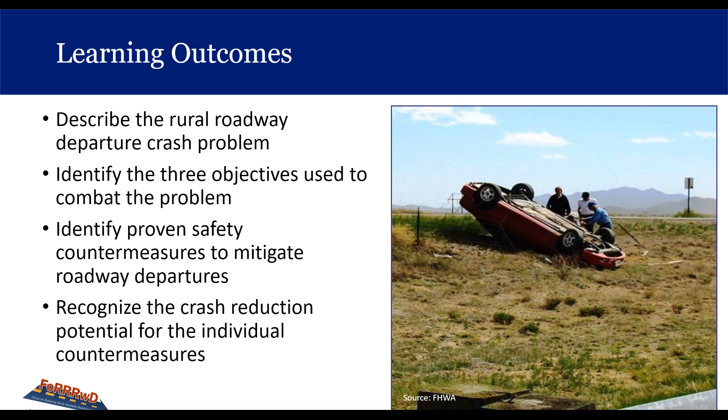So, a very sobering slide here. Federal Highway has a definition for a run off the road crash: a crash where a vehicle either crosses the edge line or a center line, or otherwise leaves the traveled way. So they don't actually have to physically drop off one side of the road or the other. They could just cross that center line, and it's considered a roadway departure because they've actually left their lane.

Unfortunately, last year we saw an increase in traffic fatalities, and you would think that's counterintuitive to what would have happened during the pandemic, since pretty much all of us on this call know that the average daily traffic went way down for big chunks of time during 2020. But unfortunately, with less traffic on the road, something clicked and people started driving in a much more dangerous fashion when it comes right down to it, because we actually saw an increase in traffic fatalities.

And that number you see there, 38,680 - that's a preliminary figure for 2020 as of the beginning of this month, June 3rd.

So of those crashes, take a look at the split on this: 49% of the fatalities are happening in the urban area, and 51% are happening in the rural area. If you break that down further, of that 51%, you're looking at 34% that are actual rural roadway departures. So if you're following the percents, the bigger percent is 51 on this first slide, and on the next slide, the bigger percent is 34.

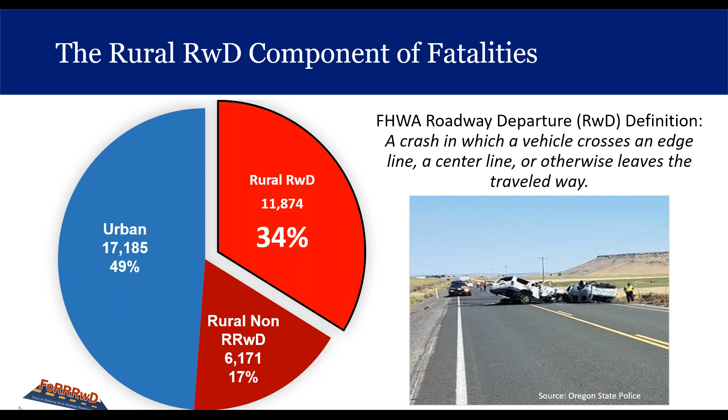So what we're trying to get to is what I'd look at as low-hanging fruit. What's the biggest problem we can tackle first? When you look at that, you'll see that these rural roadway departures really are overrepresented in the crash totals.

So if you break that down and do the calculations, from 2014 to 2016 the US averaged 11,874 rural roadway departures a year. You divide that number by 365 days, and you come down to 30 people a day.

And when you say 30 people, you really have to put faces and lives with that number. It's not just a number - it's 30 people who didn't come home and pick up their mail at the mailbox and come in and start making dinner, or come home and start working on their homework. Those were 30 empty seats at the dinner table for those families. And that's just from one day - tonight, 30 people won't be there. And it's our responsibility as roadway professionals and safety professionals to save the people behind this 30 number. And that's why you're here.

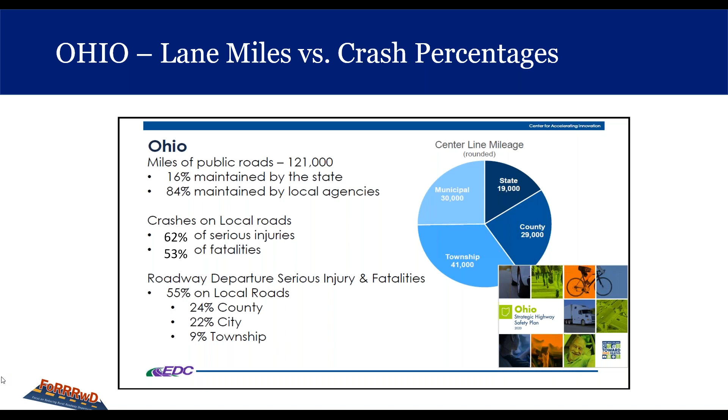All right, so we've got another Mentimeter question here, and I'm going to go ahead and pull it up. I would like to know how you think the following items, which I'm going to show here on the screen. Sorry, it's a lot to kind of navigate between things, but I want to make this as interactive as possible.

I want you on your Mentimeter to rank in order what you think the different crash types are. These are the top 5 crash types from Ohio's Strategic Highway Safety Plan. And if you downloaded the handout in the handout section for today's slides, don't look ahead. But I want you to tell me which ones do you think rank first, second, third, fourth, fifth. I did pull just the top 5, so no fear looking ahead.

And we've got 8 people who voted here. Ray, what do you think?

I'm going to give you a hint: roadway departure. But what are you thinking about for second place?

I'm thinking speed. That's what a lot of people are thinking too. I've seen some statistics from this past year that speed was involved in a whole lot of crashes, and this isn't just last year. This is straight out of our Strategic Highway Safety Plan, the document I showed an image of earlier, covering 2015 to 2019.

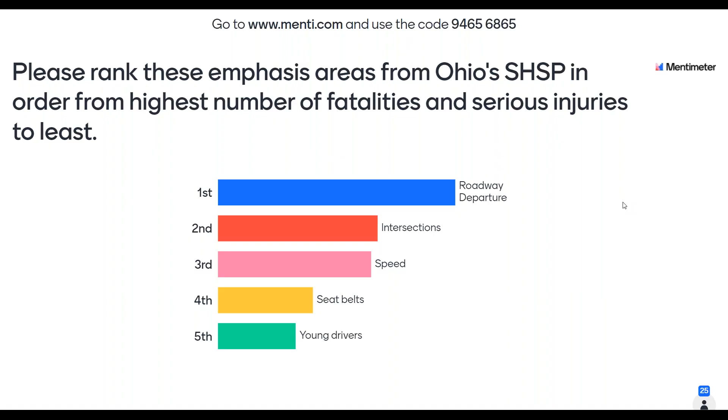All right, I'm going to take us back to the other slide and show you what the answers were. You were right, as everybody was, that roadway departure is the top cause of crashes. After that came intersections, which the 25 people who voted also chose correctly. Then you guys said speed, which actually was 5th. They attributed young drivers as 3rd and seat belts as 4th, as far as the highest number of fatalities and serious injuries. But there are more ranked farther down on this screen. I just pulled out the top section to make it as readable as possible for you.

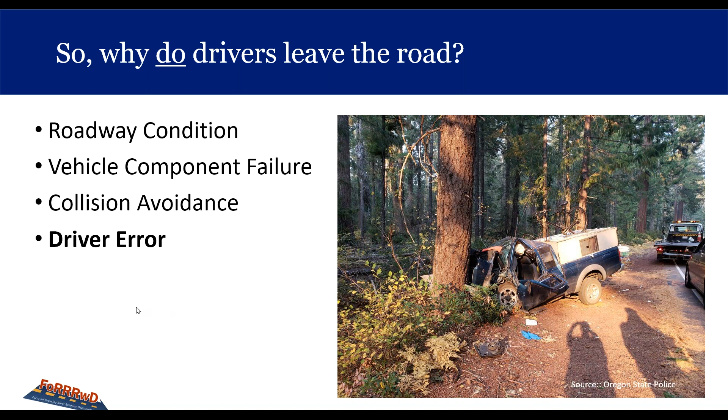Yes, thank goodness. So, I wasn't even injured at all, by the way. Well, that's good. I heard your dad wasn't too happy about losing his car, though, right? Yeah, yeah, but he's happy to have you still. So, all right, well, on the next slide - I accidentally muted myself, sorry.

The talk covers the driver being the weakest link in the system and the need to design around the human. So if you look at this Venn diagram and the overlapping parts, say you look at the vehicle being 13%, you have to take the whole of all the percents inside that vehicle circle to come up with the 13. Same with the roadway. And then the driver was actually 93% of the reason why the crashes are happening.

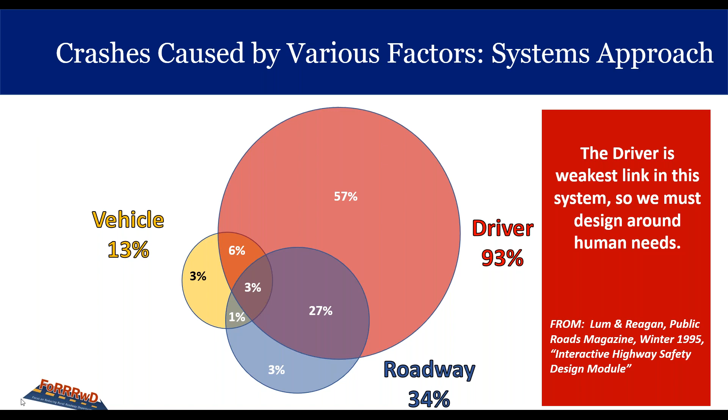So I have my own rural roadway departure story. I was coming home back in 1994, after I'd gotten off work one day and had gone to the doctor's, was on my way home on a rural road, nobody really normally on this road, and I was very young and stupid and was driving along, and came up on a car that had signaled that they were going to turn right. So I thought, get home as quick as I can, went to pass on the left, and instead of turning right, they turned left. And I T-boned them, and we all ended up down in the ditch together, and it was a pretty steep ditch - I believe my car was nose down, and by the grace of God, none of us died. But I'll tell you what, I don't pass people on rural roads anymore, and I certainly look to make sure people actually turn the way that they signal that they're going to turn. So rural roadways can be very dangerous, especially when the driver makes the wrong choice.

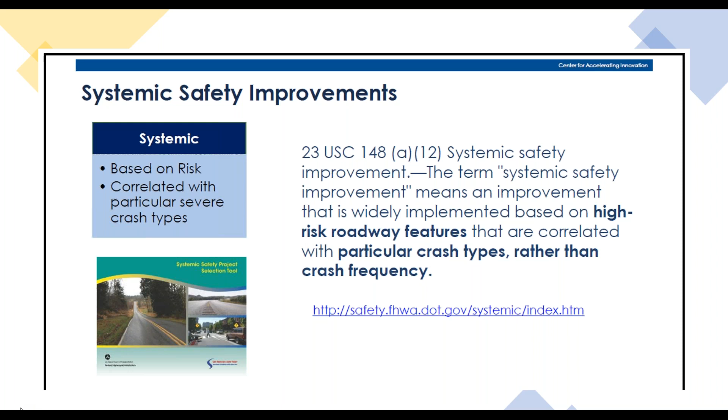So systemic safety improvements are really applicable in the low rural roadway system, our local roadways, and specific crash types. One thing in Ohio, and I'm pretty sure most of us have seen it when we've been out driving on the interstate system, the state DOT had already been focusing on systemic improvements.

So one of the first ones they did was the cable median barrier. Now this isn't something that you necessarily use on a rural road, but it's an example of a systemic safety improvement that I could say probably most of you on this webinar have seen. And they did that based on specific criteria. The median had to be under a certain width, and they put it out there on the system, and it has definitely saved lives. So you could do the same thing.

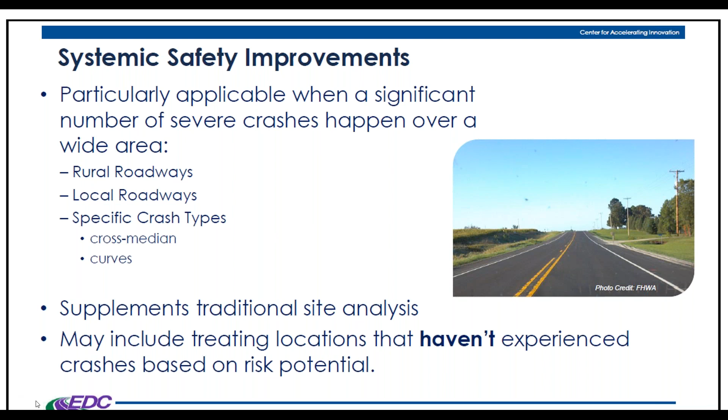You could look at your system and say, okay, any curve that has this type of radius or this type of super elevation, then we're going to just systemically make this improvement to it. So it does supplement that traditional site analysis, but it allows you to include the areas that haven't actually had a crash yet. So the roadway features that are considered high risk, there's a lot of different things you can look at, and we'll be discussing these throughout the webinar.

But one of the first ones I know that we're going to focus on are the curves. So when you look at the roadway features, you have your horizontal curve radius and the density, and the presence of a visual trap.

I could show you some good videos of visual traps, especially when you have a road that's been maybe constructed or reconstructed and the old road is still there, and it's not well signed. So you come up to it and it looks like maybe you should continue straight, but all of a sudden the road's curving off to the left or to the right. And if that person hasn't driven the road before, they really don't know which way to go.

So the presence of an intersection, especially if the driver isn't anticipating it and you have traffic that's coming into the intersection trying to cross when the person who's coming through that intersection did not have to stop on one of the approaches, then that could cause a pretty severe, if not fatal, T-bone crash.

And then your exposure, what's the ADT out there, the speed limits, or what's really the safe speed for them to go through a curve. We're going to talk about that some still this morning.

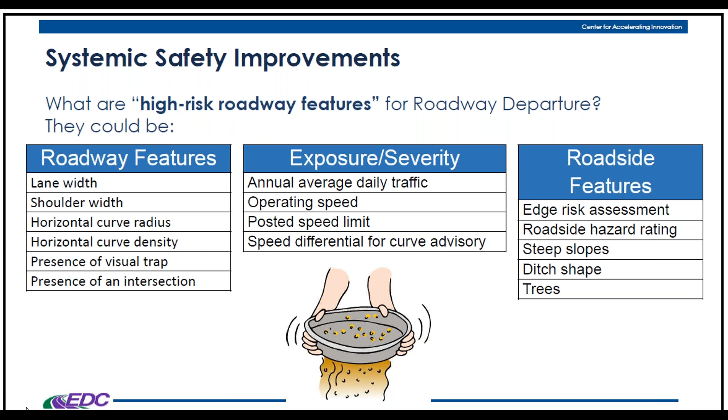So I've got another video for you. I'm trying to keep things interactive today. Actually, I've got a couple here I'm going to show you. The first one we're going to start off with, and I know it's talking about an interstate ramp, but I want you to listen to what they have to say about the curve and the advisory speeds. Then I'll show you a different video. This first one's called 'Advisory Speeds Are There for a Reason.' By the way, this is not ODOT, meaning Ohio, it's another one of those O states.

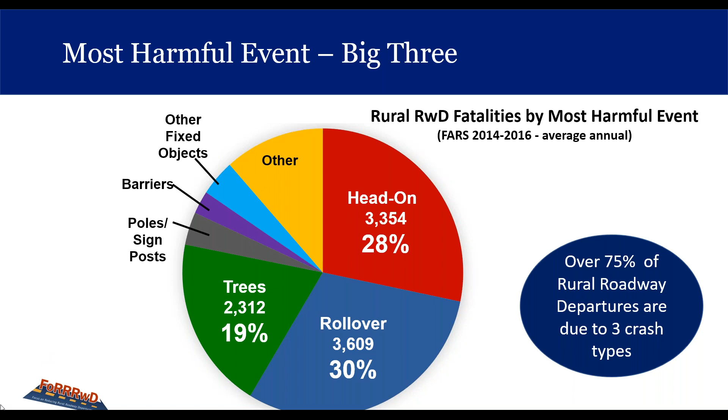So, the most harmful events, they talk about the big three, and those are your head-on collisions, which are considered roadway departures because you've left the traveled lane. Then you have your rollovers that happen when people depart the roadway, and then trees that are in the roadway. That's the clear zone I mentioned, and we have handouts for you in the handout section of the GoToWebinar box. Over 75%, based on FARS data from 2014 to 16, of rural roadway departures are due to just those three crash types. So it's really critical we look at that information and deal with the low hanging fruit.

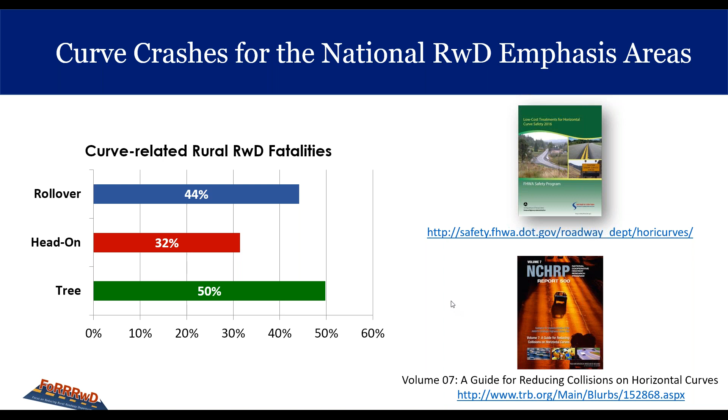Go for those big percentages where you can get hopefully the biggest impact on driving crashes down. For curve related rural roadway departure fatalities and those three types, there are some guides out there that can help you. We have provided you the PDF of today's slides, so you should be able to get to these links, and these documents are available at no charge on the internet. You can just click the link and get to the guide. Both the low cost treatments for horizontal curve safety, and NCHRP Report 500, which is actually a series of different reports. Volume 7 is the guide for reducing collisions on horizontal curves. That guide from 2016 is an update to the 2006 version that was originally done. But if you focus on how to prevent these crash types, you'll hopefully drive down the numbers on your system.

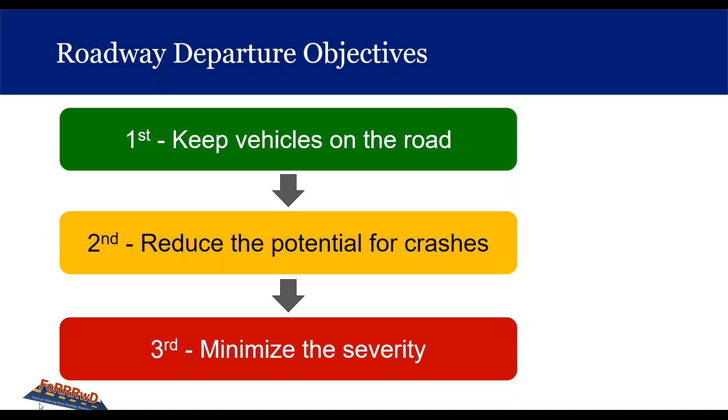So, roadway departure objectives. This was one of our learning objectives up front, if you remember. There's a three-part way to look at this. The first thing we want to try to do with these vehicles driving our rural roads is try to keep them on the road. So that's where you're looking at different types of improvements, such as your curve signing, pavement markings, friction treatments, and rumble strips.

One thing that baffles us when we look at crash reports is it isn't always the curves on rural roadways where people run off. We really feel that people pay less attention on a rural straightaway than in a curve because they feel safer. The road's going straight, so they think they can look away to change the radio or check a smartphone, which they should have turned off and locked in the trunk, because distracted driving is impaired driving—just as bad as, or worse than, driving drunk.

So these types of treatments, especially rumble strips along the side of the roadway, can help with those straightaways, get people re-alerted, and make sure they get themselves back into the roadway where they should be.

And if they do end up departing the roadway, we want to reduce the potential for a crash by making sure, if at all possible, that there are shoulders. We're going to talk about the safety edge. Our LTAP center has a safety edge paving shoe—if you've never tried it and your contractor doesn't have one available, we'll loan it to you. It costs less than 1% of your entire paving project to add a safety edge, and it clearly helps people get back onto the roadway.

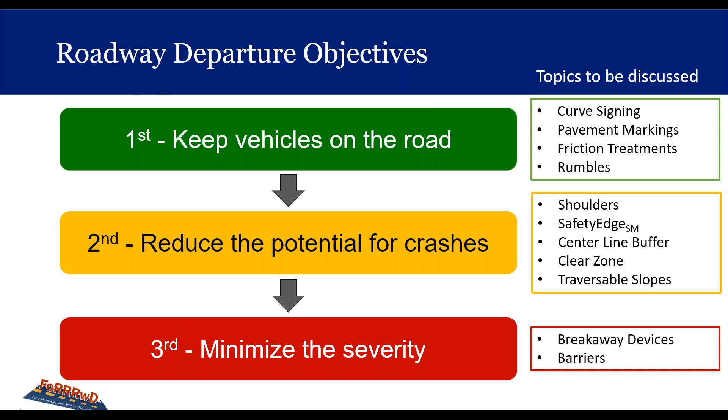And if they aren't able to stay on the road, and you're looking at reducing the potential for crashes but can't get them back onto the road quickly and easily, and they end up in an actual crash, you want to minimize the severity. That's where we'll talk about breakaway devices and different barriers. So remember these three principles: keep them on the road, reduce the potential for a crash if they start to depart, and minimize the severity if they can't get back on the roadway.

I mentioned crash modification factors earlier, and as part of that there are also crash reduction factors. The Highway Safety Manual has the methodology for calculating these, but there's also the Crash Modification Factors Clearinghouse, which can be a big help. The crash modification factor estimates the change in how often a crash is going to occur on a specific element of the roadway by implementing a certain countermeasure.

They look at the base condition, which is 1.0. If your crash modification factor is less than 1, it means you'll have fewer crashes. If the factor for a change you're considering ends up greater than 1, you don't want that, because it means more crashes. The crash reduction factor is the actual percent reduction in crashes that can be expected—this can be positive or negative, with negative meaning an increase. Hopefully I didn't confuse you there.

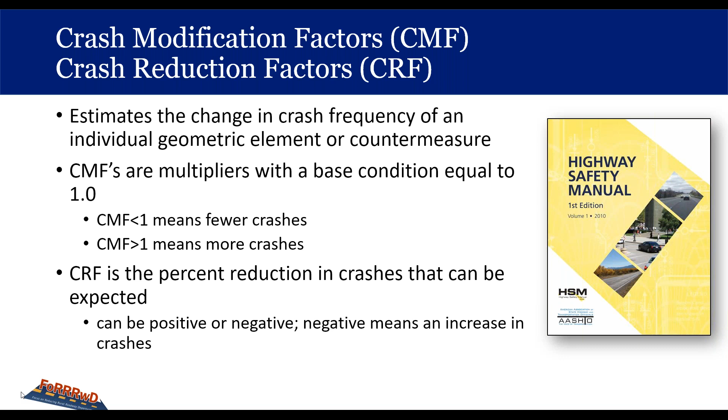Just remember, once you put the change in, you want your crash modification factor to be less than 1. And there is the Crash Modification Factors Clearinghouse out there—I'll definitely send you a link to that.

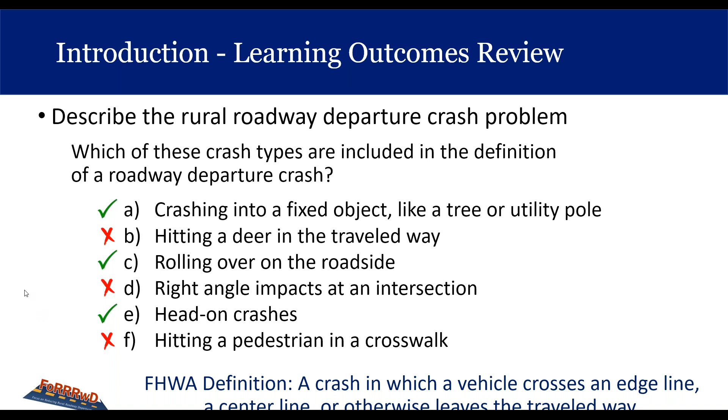So there's the definition at the bottom. Hopefully you've got that now, but it seems like the majority of you did, so that's great. All right, I'm going to switch back to Menti. We're going to do the second of our questions.

All right, what percentage of roadway fatalities are due to roadway departure crashes on rural roadways? And this, we're looking at nationally, we're not just focusing on Ohio. There was a percent that was given, so hopefully you guys will be able to remember what that percent was.

I love the little dot exercise here where it kind of spreads out into different dots on the screen. This is probably one of my favorite little Menti screens. Just keeps things interesting.

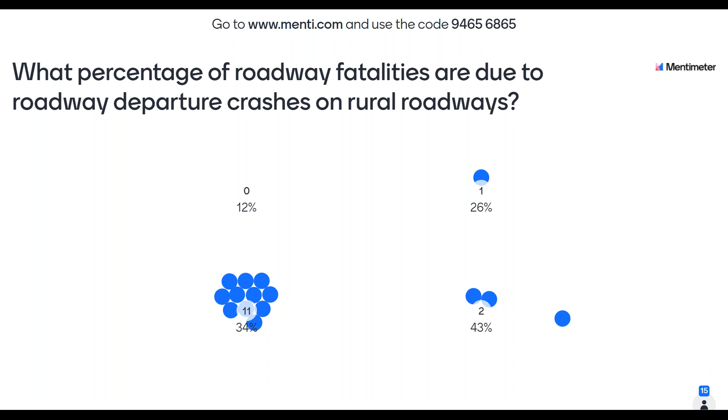Oh, we're getting up there in numbers. Okay good, getting even more responses than the last question. That's awesome. All right, I'm going to switch us back over so we can see the answer.

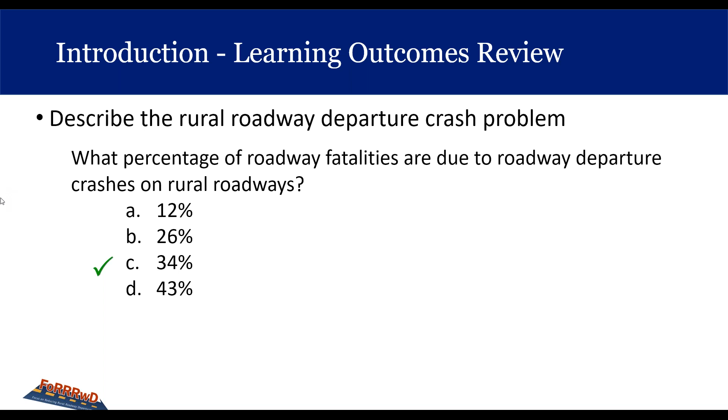Okay, so the percent, and 11 of you actually chose this, is 34. Good job. All right, and then the last of our Mentimeter questions for the day.

Oops, there we go. This is going to be the last of our review questions for this module. And you're going to type this in. But what are the 3 objectives used to combat roadway departure crashes? And we just went over this, so hopefully you guys remember that.

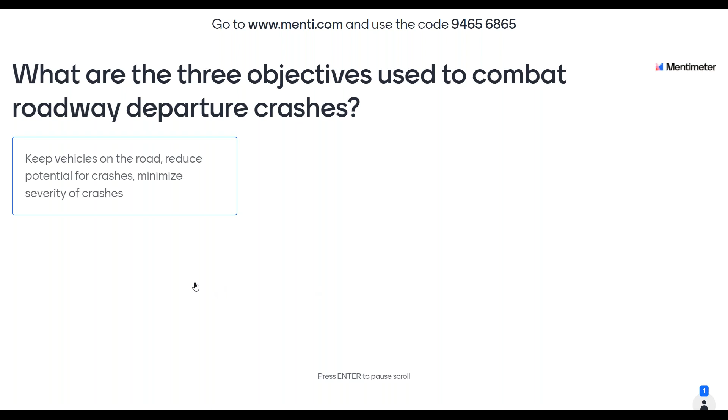Type it in for me. Hopefully somebody will type it in. I know Ray's not connected to Menti, so he can't type it in for us. But all right, here we go.

Keep vehicles on the road, reduce potential for crashes, minimize severity of crashes. Good, keep vehicles on the road, yeah, that's one of them.

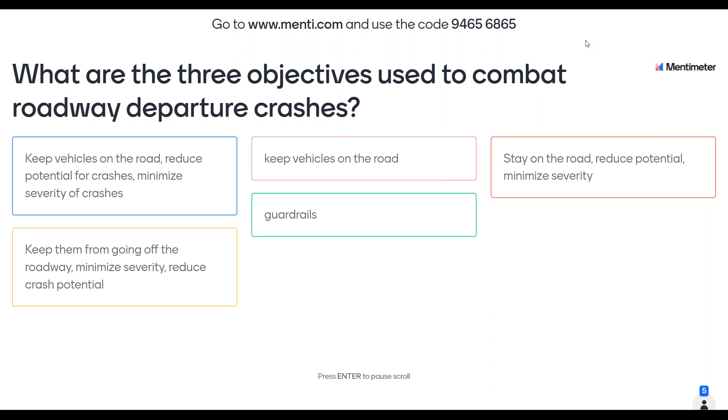Folks must not like to type as much as they do, we're just clicking to respond. Stay on the road, reduce potential, minimize severity. You got it. Yeah, guardrails is definitely a way we can do that. Yep, you guys are getting it.

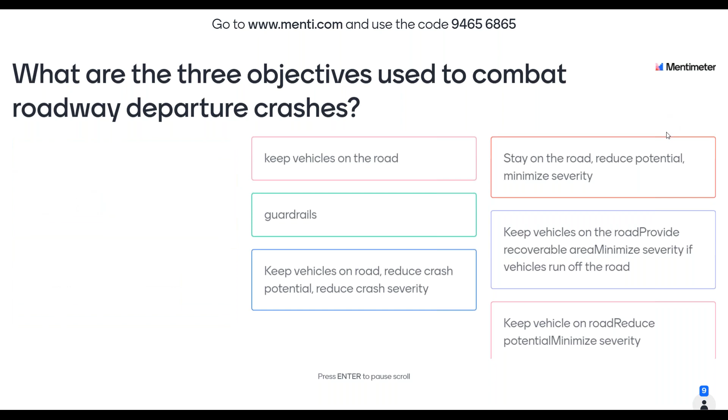Good, well I'm going to give you a second or two more to finish typing in for anyone who started typing that in, I appreciate it. And then I'm going to switch us back to our presentation here and the answer to the question.

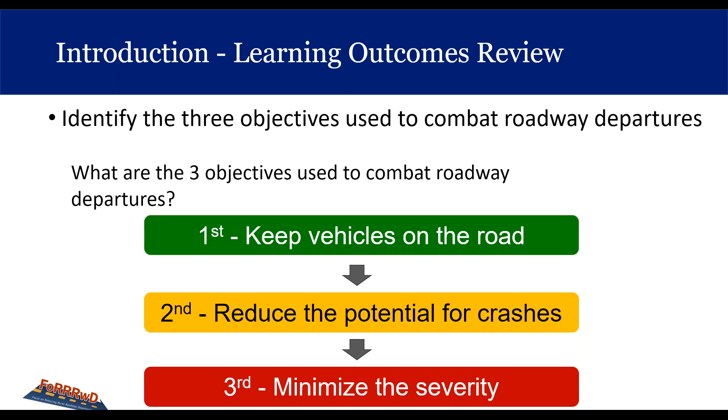We've got keep vehicles on the road, reduce the potential for crashes, and minimize the severity. So great job, guys. All right, well that's going to move us into our second session, second module in the course. And it's keep the vehicles on the road, signings and markings.

We're going to start getting into the actual application here of different types of countermeasures. So our learning objectives in this session module really is that we want to identify signing and marking countermeasures that can help you reduce your roadway departures.

And we're going to go over requirements from the MUTCD for signing and markings. And then we're going to talk about cost-effective enhancements that can actually exceed, because sometimes you're going to need to exceed, that's what it comes down to. I don't know if you caught it on that video of the advisory speed for the curve over in the state of Oregon, but not only did they put the advisory speed on the right-hand side of the road, but you saw that they had it there on the left, and that was to capture people's eyes. They were having a problem there, and it was a low-cost way to exceed the requirement.

And you have it on the right as a requirement, but they also put it on the left, which definitely was exceeding the MUTCD requirement, but it added an additional factor, a level of safety. So doubling up signs is always a great step.

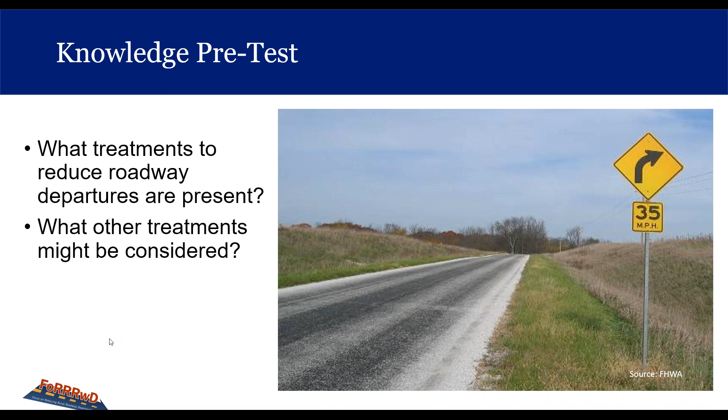So when we first started through LTAP working on road safety audits, we worked with the Warren County engineer, Neil Tunison, and we were able to assist him with getting signage put up on a lot of his roadways that had been identified as high-risk rural roads in Ohio. He was able to get the majority, if not all, of those roadways off that list from just the signage that we were able to assist him with getting put up. But he said one of the things that really surprised him, because not only did we help him with getting additional signage put up, like doubling up signs, but we went much larger in the size of the sign, big signs, and they were bright, they were retroreflective.

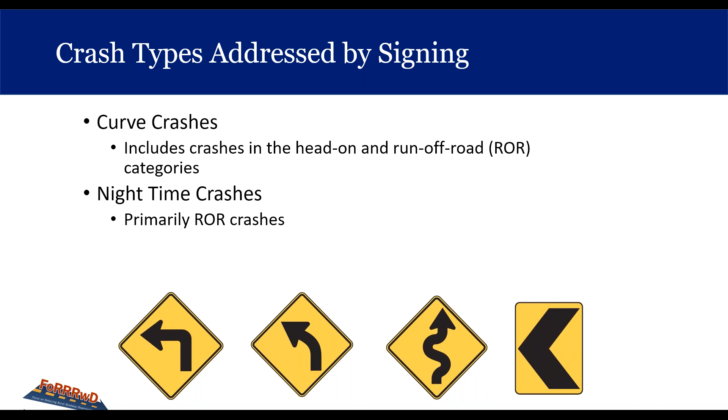He was really worried. He's told me this story, he said, I was worried those signs looked like the size of the highway signs showed up, but we went ahead and put them up anyway. And he actually had people coming up to him, even after church, different places, thanking him for the larger signs and doubling them up. He said they felt so much safer driving on those roadways, they could see the signs better. You can tell, even from the numbers afterwards when we measured it after the installation, it helped them out.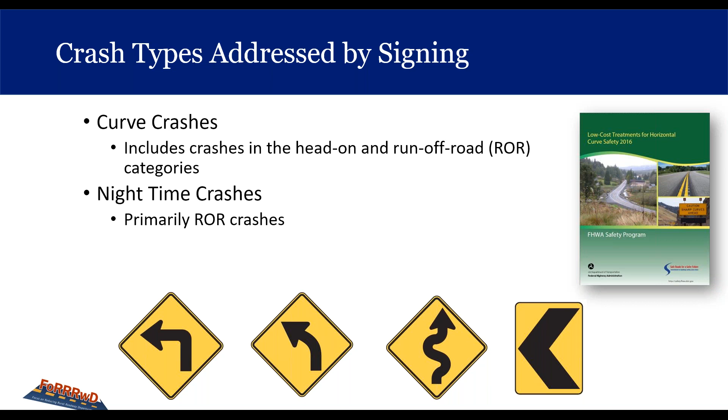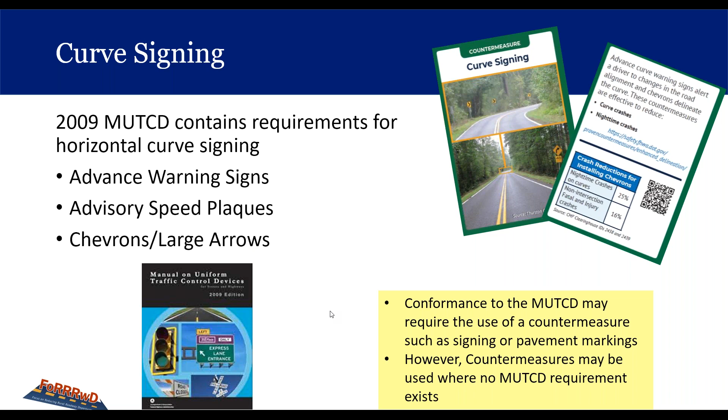So again, low cost safety treatments, that's one of the treatments in that manual that you can take a look at. And then on curve signing, the 2009 MUTCD, which is the basis for Ohio's 2012 version, contains the requirements for horizontal curve signing, and this is some of what Ray's going to go over with you here shortly. It talks about advance warning signs, advisory speed plaques, chevrons, all of that. And it's section 2C.06, the horizontal alignment warning signs.

This is something that Ray's going to discuss with you, but it talks about how horizontal alignment warning signs shall be used in accordance with Table 2C-5 on freeways and expressways, and any arterial or collector with an average daily traffic of greater than 1,000.

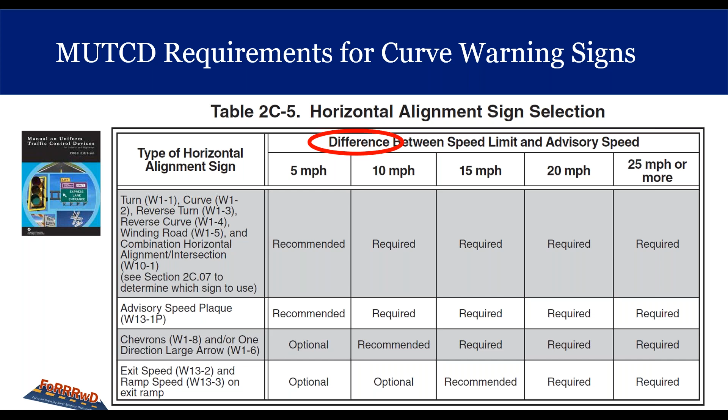Okay, so the advance curve warning sign—you've got some options with that, and it's all about the difference between the speed limit of the road and the advisory speed. This table 2C-5 walks you through your decision-making process. So if you look on the left, you've got different types of horizontal alignment signs, like the turn sign, which is for when you have an advisory speed of 30 miles per hour or less, with 90-degree arrows on that sign.

Your curve sign is when you have 35 miles per hour or higher, and the arrow is actually curved. It goes over different types of signs, and as you progress to the right on this table, you see the difference between the speed limit and the advisory speed—either 5, 10, 15, or 20 miles per hour—and you can see what type of horizontal alignment sign is recommended, required, or optional in these situations.

In the picture that showed the advanced curve warning sign with the advisory speed plaque, you see that plaque is in the second box down on the left. You can go across and see where those are either recommended or required. As soon as you get a difference of 10 miles per hour between the speed limit and the advisory speed, you're required to have that advisory speed plaque attached to that sign.

Then as you get past the advisory speed sign and actually get to the curve, that's where we talk about chevrons and the one-direction large arrow. As soon as you get to a difference of 15 miles per hour between speed limit and advisory speed, that's where those types of signs are required. They're recommended at 10 miles per hour and optional at 5.

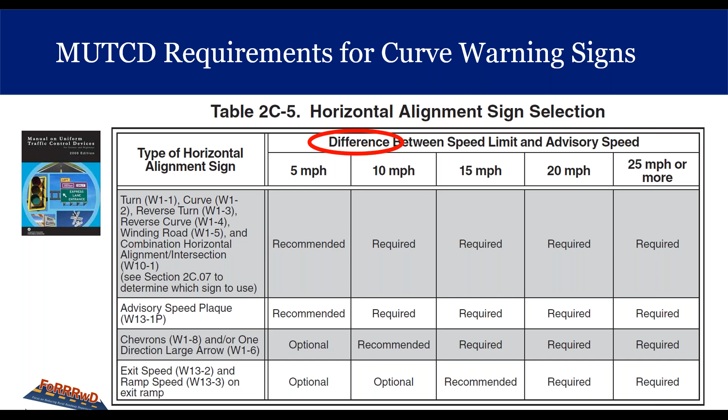The bottom box has more to do with freeway and divided highway examples with exit speeds and ramp speeds. But for this class, the top 3 boxes on the left are what we're shooting for in this rural road type of class. So this is an important table to know about—that's table 2C-5. We really use that a lot with our township sign grant training process.

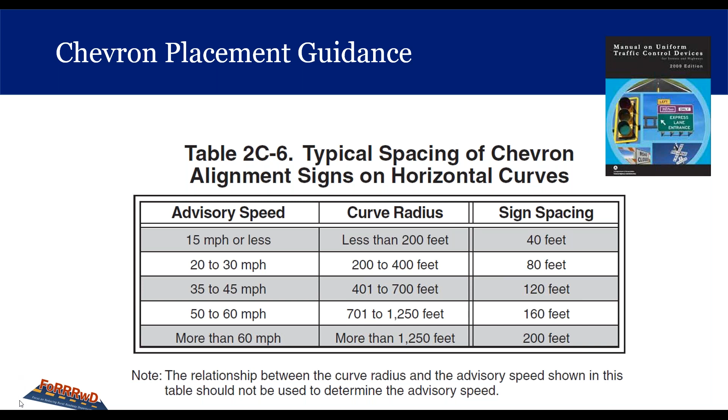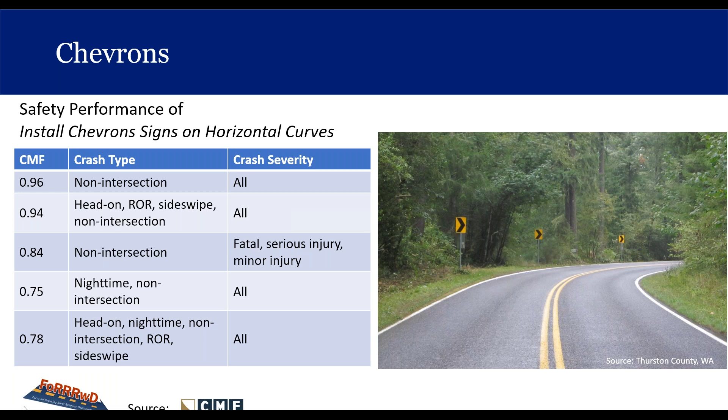Head-on crashes, I don't think Victoria talked about this, but most head-on crashes happen in curves, and that's because it takes a certain amount of coordination to get through a curve, and not everyone has the same abilities. So you got to lower your speed and stay centered in your lane, but a lot of times people don't stay in their lane in curves, and they go left of center and cause a head-on crash. Delineating these curves as best we can, adding chevrons and pavement markings, helps people stay in their lane. This is an example of how the treatment of chevrons does have a crash modification factor tied to them, and they are definitely one of our most popular, most common low-cost treatments for curves.

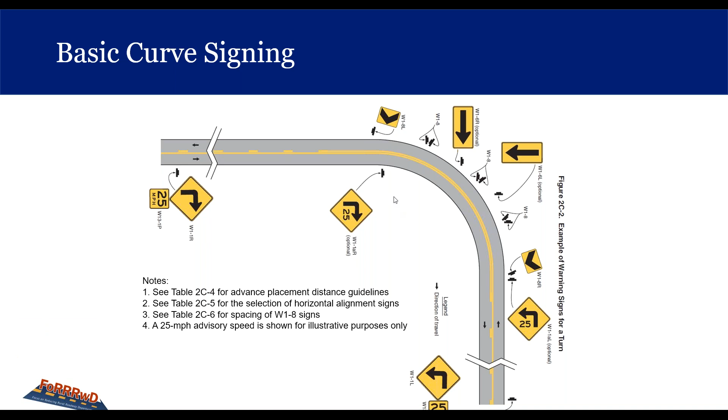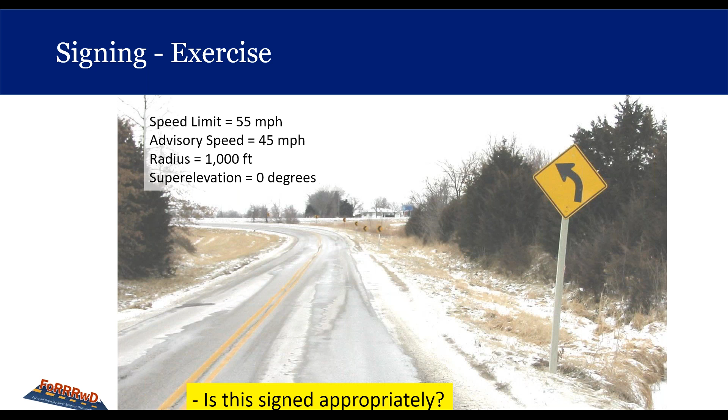All right, let's have an exercise here. The question is this: with the details of the curve at the top left of this picture, the speed limit is 55, advisory speed 45, radius of 1,000, and super elevation of 0 degrees, which sadly most rural roads have, which doesn't help keep you on the road. Is this curve signed properly? We have the advance warning sign, which shows the shape of the curve, and in the curve itself we see some chevrons. Is that all we need for this particular curve? That's the question for you guys. Or would you recommend more to this curve?

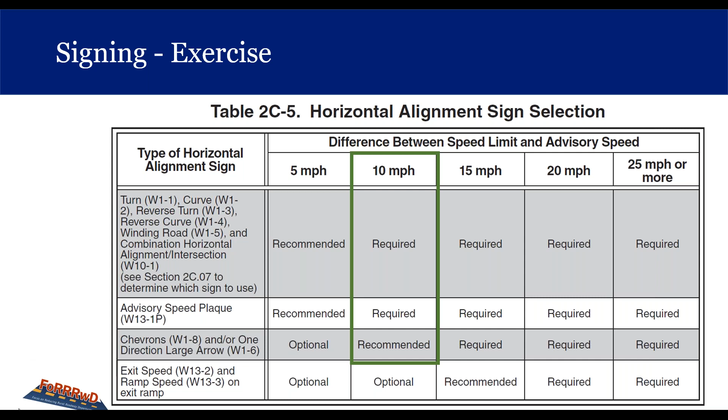So if we go back to our table, we see that this particular curve has an advisory speed of 45, speed limit of 55, so that's a difference of 10. We have the box highlighted there for 10 miles per hour. We have certain things that are required, others are recommended. We see that they do have chevrons. However, looks like maybe there's some things missing. So what's missing? Type it in the question box. Okay Ray, we have folks putting in their advisory speed plaque and then sign spacing. Advisory speed plaque's gotten 3 votes so far here, 3 people put it in, and 1 person put in sign spacing. Right, they need the advisory speed plaque, it turns out.

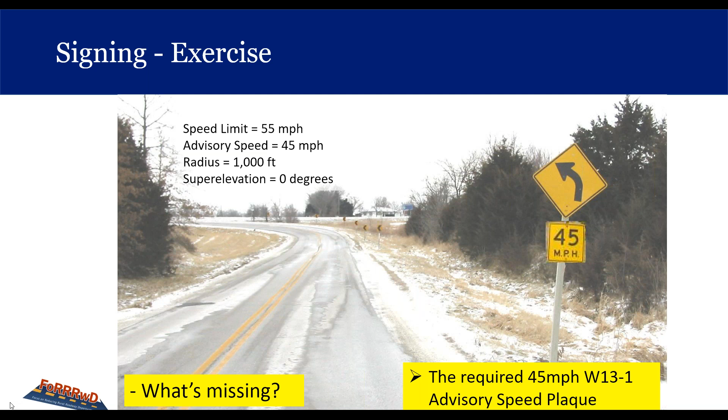There's certain other things recommended that's not required, but if you see something that says recommended, and it's low cost as a sign, the question is, why wouldn't you install it? And that's what we preach to our townships. We're actually buying all the signs they want, so why not put it on their list? So one of those is the one-direction large arrow sign. They could have added that as well. The other thing I like to throw in again is the retro-reflective post-mounted strips that we found out cost about $4 each. So why not load up your curve signage with those reflective strips on the posts as well? They really make a difference, making them stand out. So that's a good exercise in how we come to the decisions of what signage is included in a curve.

Yep, and here's your information on the chevron spacing. But somebody did add in there too that they thought a little more snow and ice removal action would help too. Probably, especially with the 0 degrees of super elevation. So there's nothing there to help you stay on the road, as far as the force of gravity helping to pull you to the center of the curve instead of slingshooting you off the right side of the curve there.

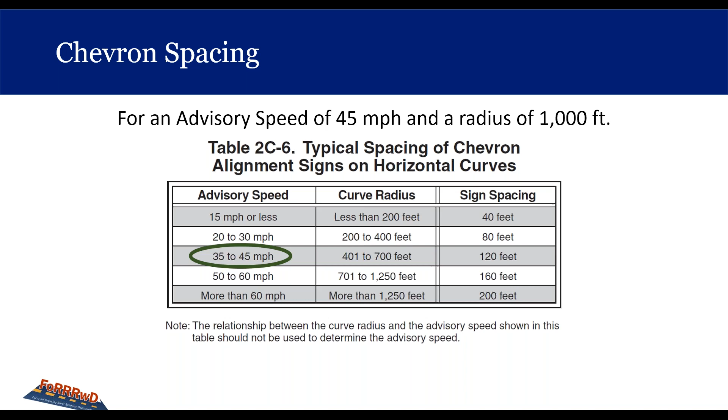Okay, so there's how we came up with the spacing of the chevrons. I would guess, I don't know, would you guess, Ray, that they probably did need to space those out, or actually using a tighter spacing is what it would have been? Yeah, the FHWA recommends, when you have 2 choices to make, they recommend tighter spacing, just to give better guidance from beginning of curvature all the way through the end of curvature.

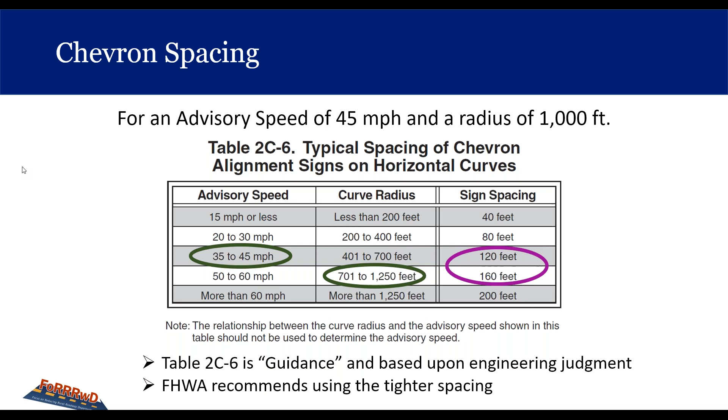Those next topics, your favorite, Ray. Aren't you like the star of a video on ball banking? Yes, oh my gosh, I've become a millionaire—don't tell anybody—off all the hits on my YouTube video on how to conduct an advisory speed study. I kid, I get nothing.

But we do have a video on our LTAP website on how to properly conduct an advisory speed study. There are different methods to determine the advisory speed. One is to use an accelerometer, which we call the digital ball bank indicator, which you can borrow from us. We have several in our possession that we loan out as part of our equipment loan program, and that's what we show in the video—how to use that properly.

There's also a design speed equation, or a traditional ball bank indicator. The old ones had tubes with some sort of liquid in there, and it would measure the centrifugal force—how the water tilts as you drive through the curve.

I saw that Dick McGinnis is in class today. I'm sure he's a real whiz at that traditional ball bank indicator, right, Dick?

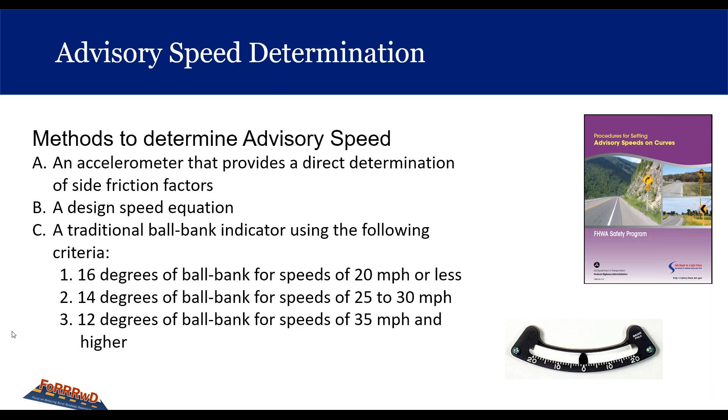Thanks for letting me interrupt, Ray. No problem.

Am I talking about this one too? Yeah, you were going to talk about this, our case study of how they determined the advisory speeds of their curves.

Down in Baldwin County, Alabama, they use the Rieker Curve Advisory Reporting Service. Rieker manufactures the digital ball bank indicators we have, but they also have a service called CARS, the Curve Advisory Reporting Service. It collects data on a single ride through these curves and produces automated reports that comply with MUTCD requirements. Baldwin County decided to use this service for crash investigation, citizen complaints, and updating their paving program.

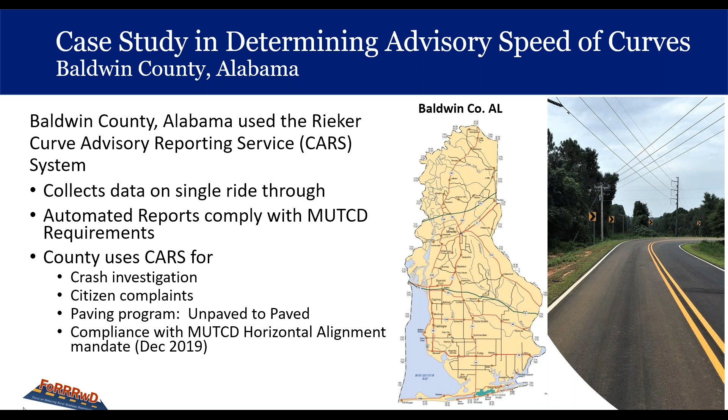They wanted to make sure they were complying with the MUTCD horizontal alignment mandate, and this is the largest county in the state. The Rieker CARS system makes use of cloud data storage, allowing access to the data upon logging onto the CARS portal.

So I would think if they have the money to afford the service, this is another way to get it done. But we know jurisdictions' budgets are very tight, so I wouldn't necessarily say you have to do the service, just be aware that it's out there. If you do have the funding to pay for it, you can use that system and get through quicker than borrowing a ball bank indicator and putting two people in the car to drive through every curve at different speeds.

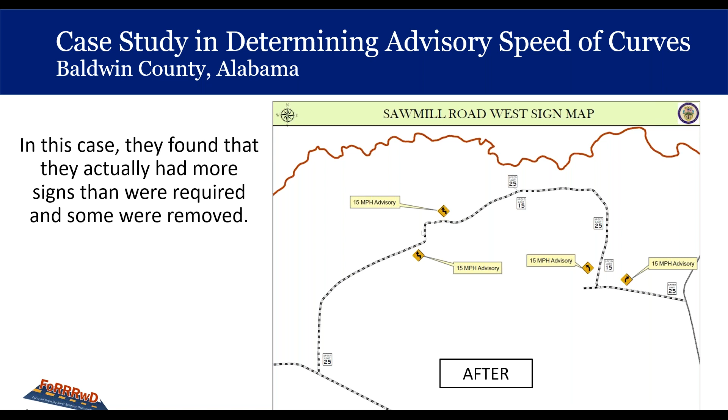So that brings us to our last slide for the day. Ray, you've done a great job, we're ending right on time. We'll be respectful of everybody's time, but we want to make sure you realize with these curve sign enhancements that there are additional treatments that can be used that exceed the MUTCD requirements.

That's where we talked about the bigger signs. You can double up signs, use fluorescent yellow prismatic sheeting, and you can use overhead placement.

Ray, anything else you want to add before we wrap up? Well, I was going to say, back where we were talking about that case study in Alabama, I think what happened was people weren't paying attention to those advanced warning signs or the advisory speed plaques because there were so many of them. When they reduced the number, it actually became more effective.